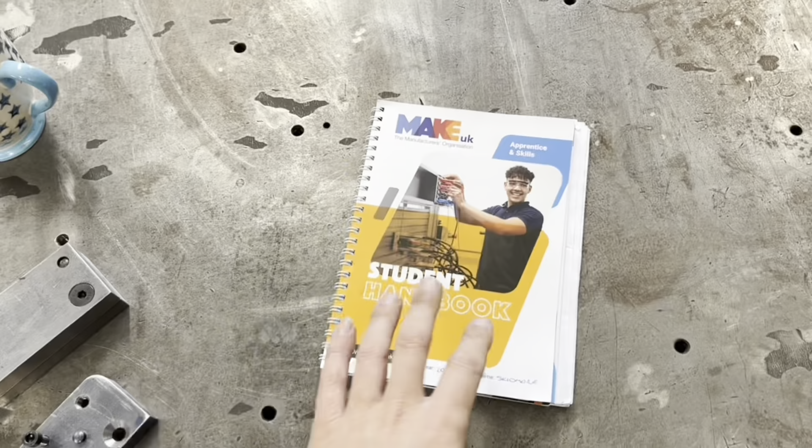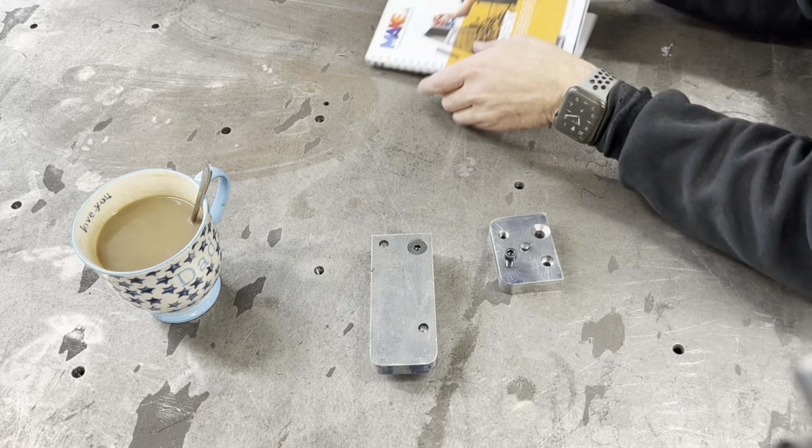Right, let me show you what we are doing now. So this is my place, Make UK. This has got all notes and stuff in, where you are and what you've been doing. This is my practical, so let me get it set up. And in here I've got the drawings that we have to work to.

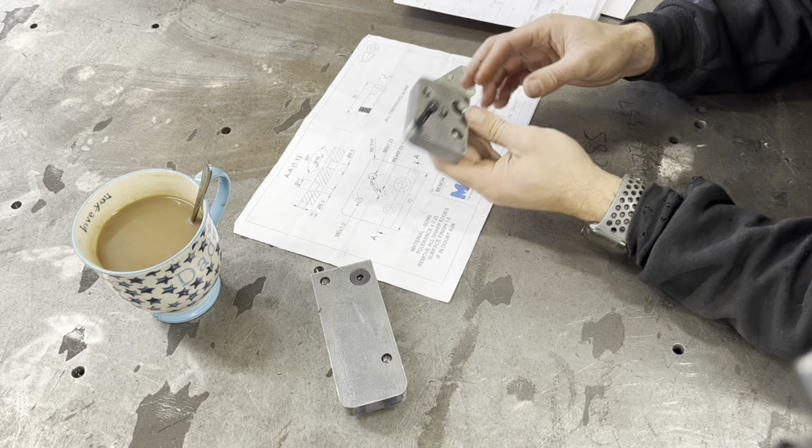So this one first is this - this is your test piece, right? And it's pretty simple. It starts off at 16mm, 50mm flat bar, cut on a saw, oversize - we've allowed 0.25 tolerance, which is quite a lot of tolerance when you're looking at machining sides of things. But we have to bring this into tolerance with a file, would you believe? So I have filed this square.

To where you cannot get a 0.05 feeler gauge in - that's how square that is, filed by hand. This is a number 5 radius, also filed by hand. Then we have an M6, an M8, a counter bore and a countersink, and this is a 6mm reamed hole, so it's nice and tight on that dowel. But you start off with just a block and you have to input your datums, your information. So you know your center hole is a 6mm ream, and that is the center of your part, dead center.

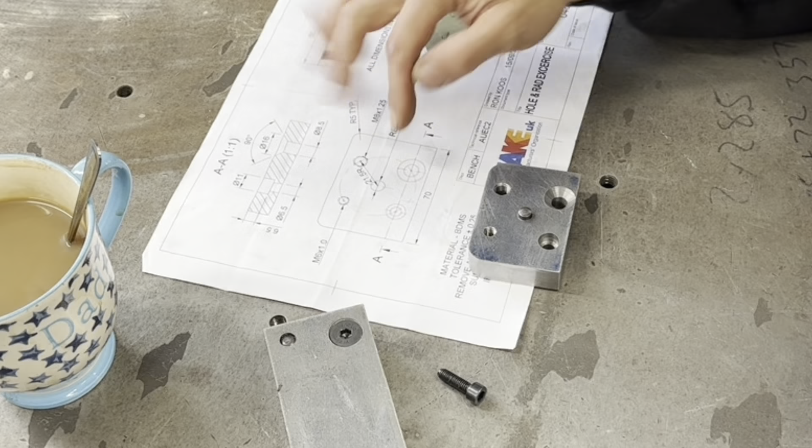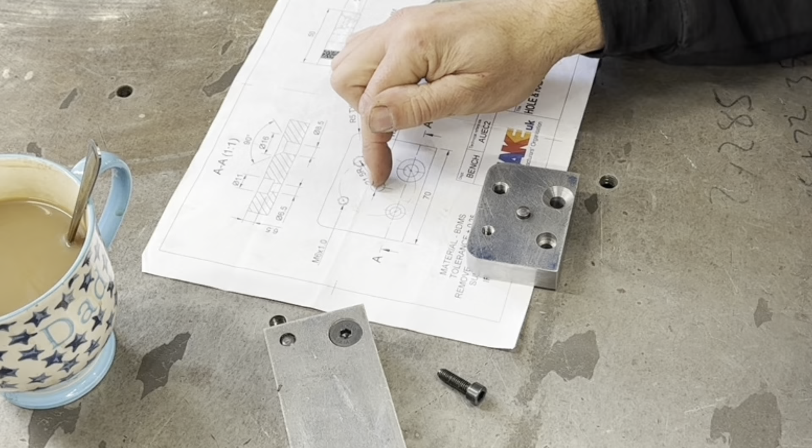Then instead of giving us locations for this, he gave us a radius - we've got a 21.5 radius. So then you have to work out the radius and the positioning of your radius to get your 45 degrees through your radius, do you know what I mean? So you find your center, then you put your 45 degrees off your center, and then you put your center line radius in. It gives you your center points. Then you've got your...

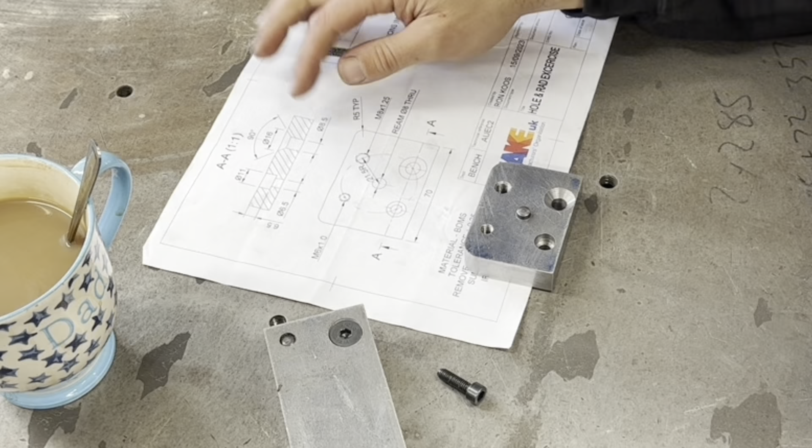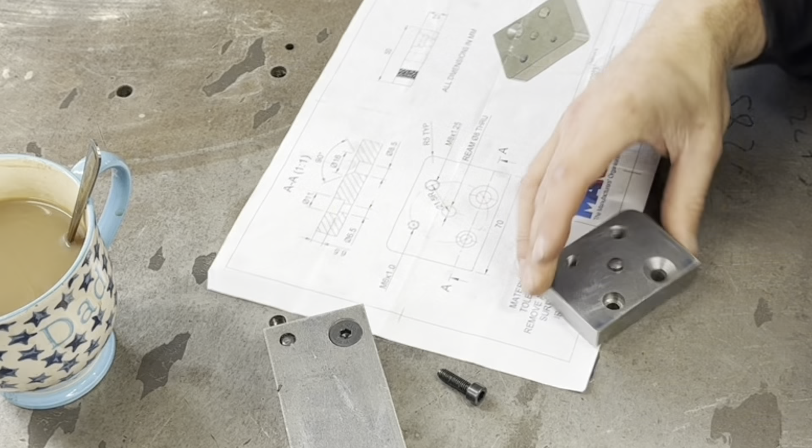Dimensions for your holes. This is the clearance 6.5, so for an M6. Clearance for an M8, 8.5. You've got your radius, you've got your diameter of your top of your counter sink, and then that's about it really. It's mainly just to prove that you can get it to where they want you to be and you're in. Let me show you the difference between a counter bore and a countersink, in case anybody doesn't know the difference.

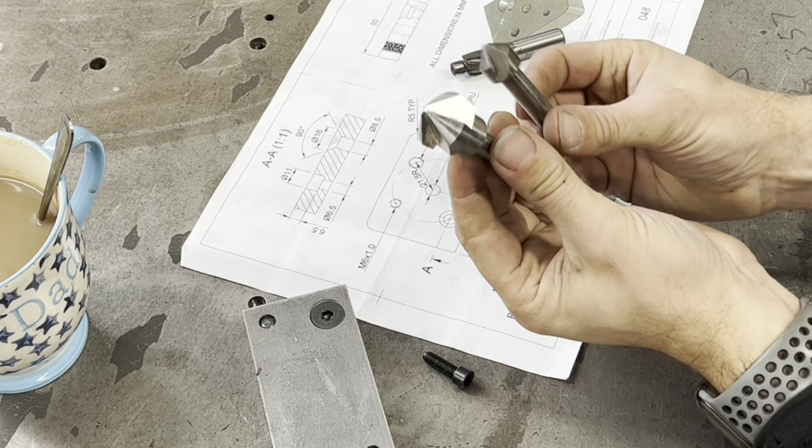So let's zoom in a touch for you. So these are countersinks, yeah? They are triangular, basically, sort of thing. And they are for, like, say this, yeah - countersink, countersunk bolt, countersink.

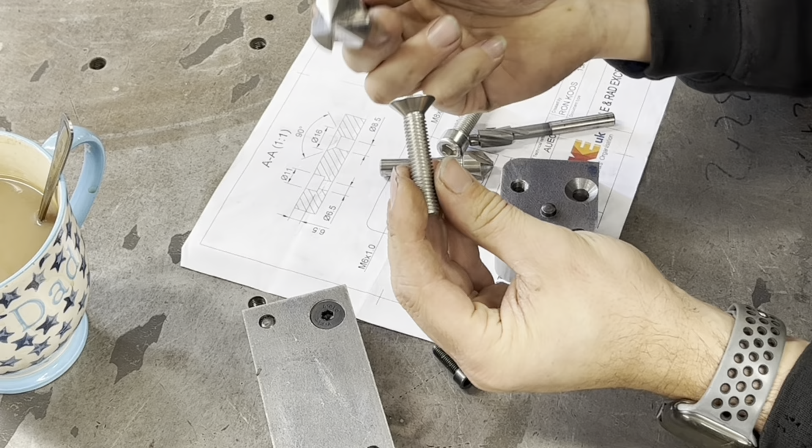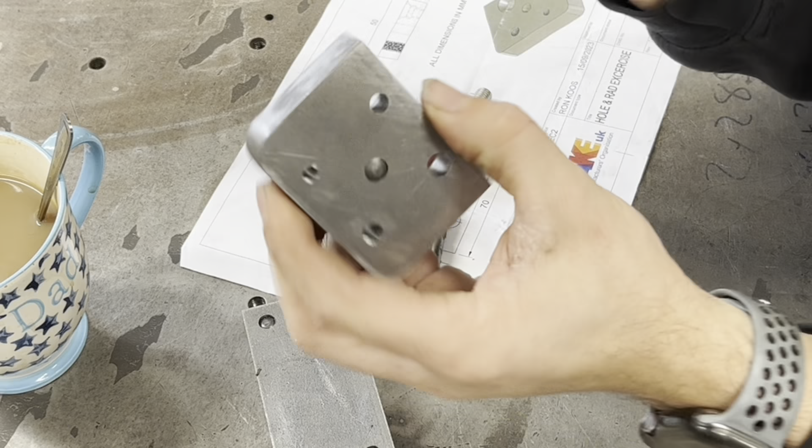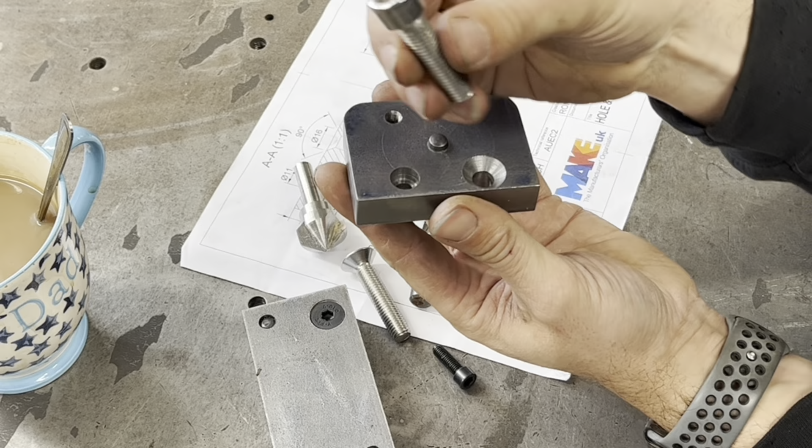Counterbore is this - you are boring a flat in, yeah? So you will drill your hole, which in this case is 6.5mm. Then that section there is guided by your hole. And then this is your bore, so you are boring down as much as you need. And that is for this type of bolt. I should have brought one over really, but I didn't, did I?

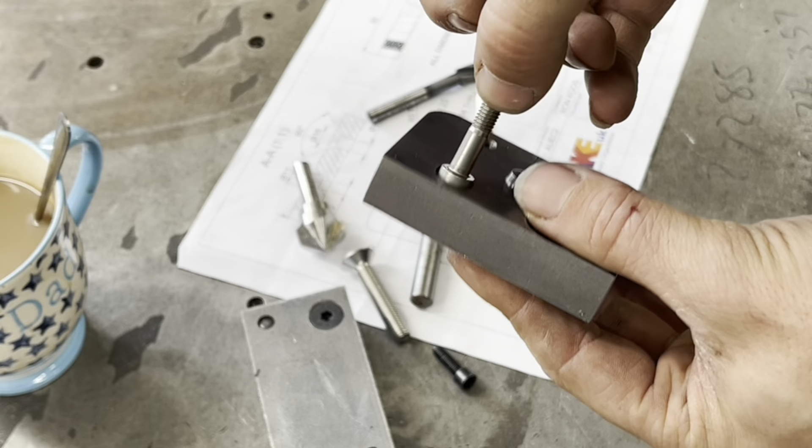So, counter bore. See? So everything is flush fit away. Dog's chasing a pigeon, yeah? So that is what this is for. This is to show you can do your markings out and come within spec. You know, this is within spec - we worked it, it's about 0.05, 0.07 within spec.

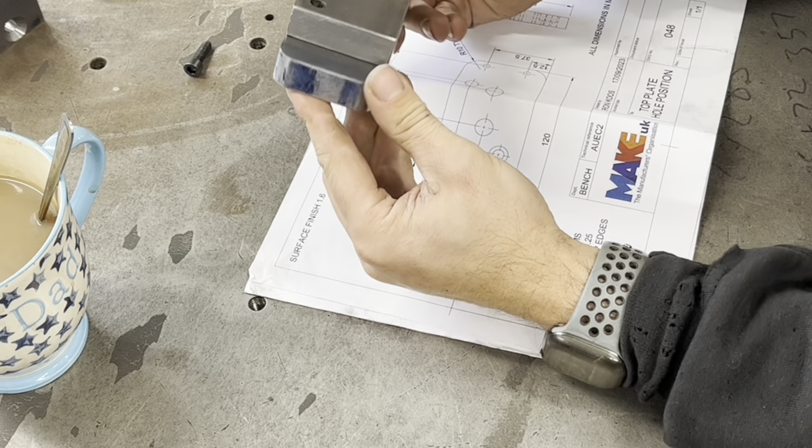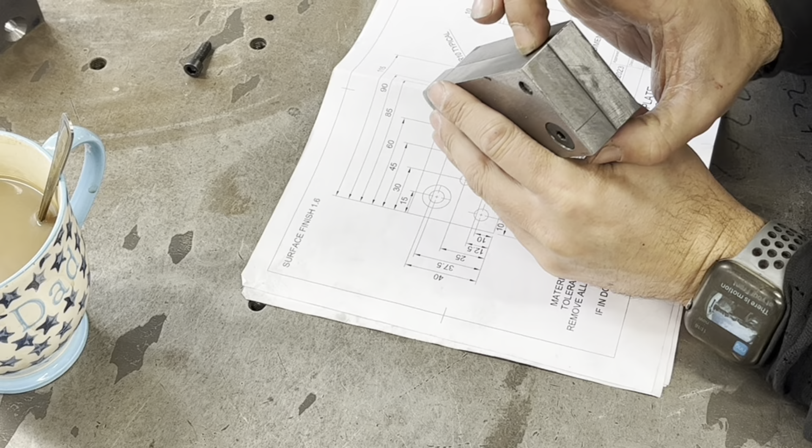Now you'll pay good money to get that kind of spec. So we'll move these tools out of the way, move this drawing out of the way, and we'll move on to these two drawings. This is this unit. Now this is also filed within spec by hand, R10 radius, square. To be honest, it came out better than I expected it to come out. These are perfectly parallel. So this is this unit - here we have two M8 reamed holes, and this is my countersunk.

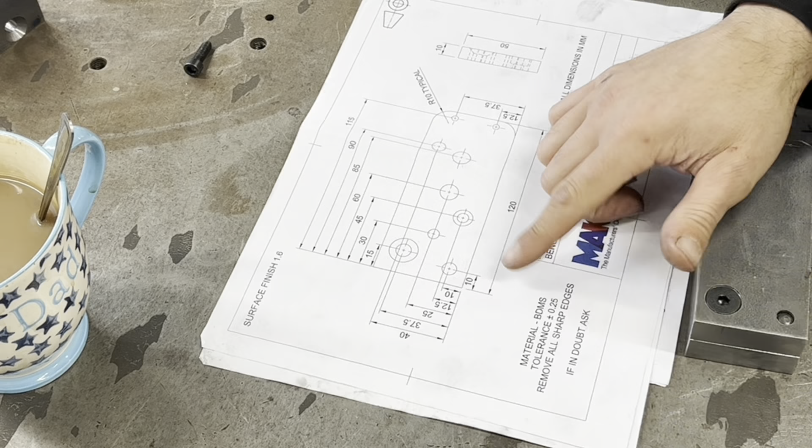So on this drawing, you can see this is our datum point. Everything works off this datum point. So our measurements go here, from here.

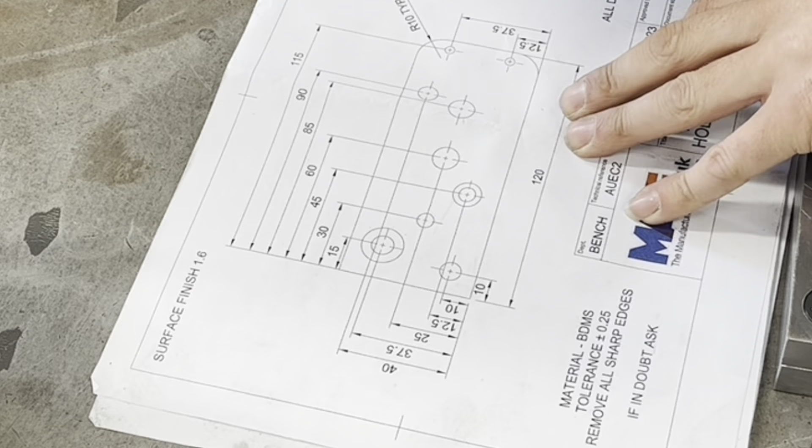We've got 10mm, 15mm, 30mm, 45, 60, 85, 90, 115, total 120mm long. So you're coming in 15mm and going up 37.5mm. This is how we are finding our positions on our plates.

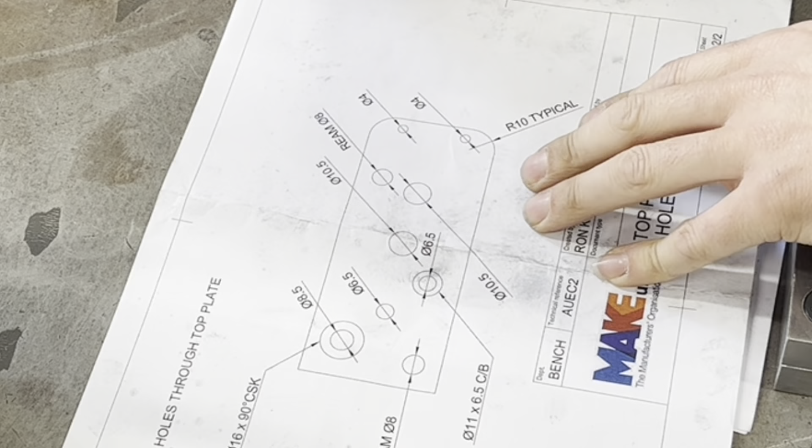There is another drawing. This gives us our hole sizes, which tells us what's what basically. So we've got, these are number 4 rivets, but we might not be using the rivets now, which is a shame because I've never done that before.

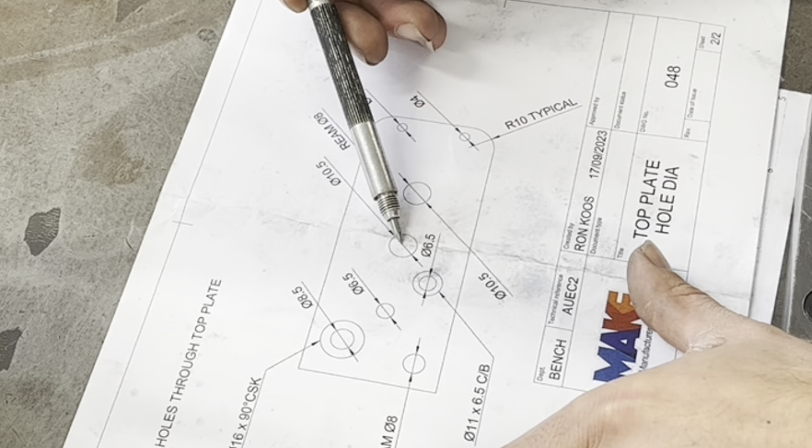This is our M8 reamed hole, ream number 8. This is a clearance 10.5. We've got our countersunk 90 degree, which is one of these, 90 degrees across its plane. 16mm top dimension, 8.5 clearance. This is a 6.5 and this is a 6.5 counter bore, CB, counter bore.

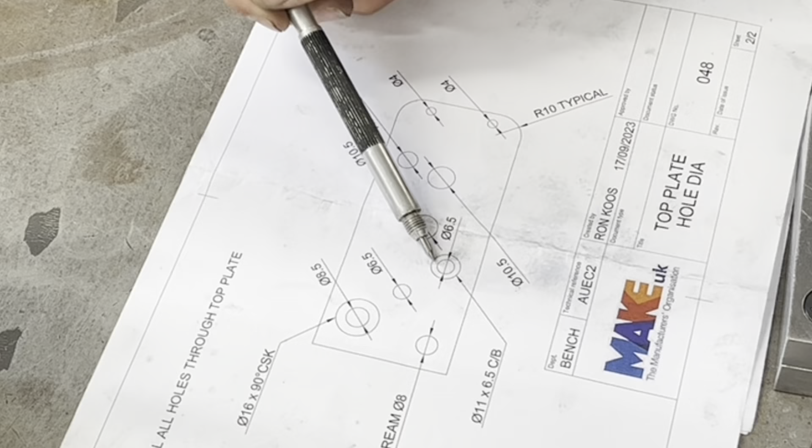So all of these are clearance holes in the top plate, and the bottom plate is where all the bolts are going to screw into, pass through, or blind hole, open hole kind of thing. That's where the next drawing comes in.

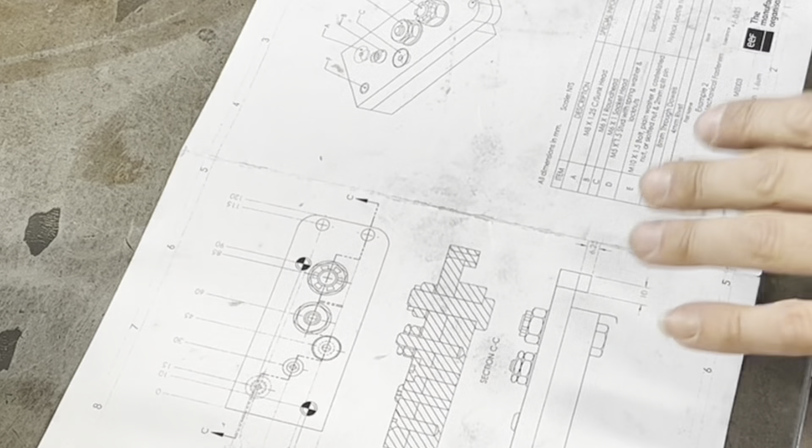Where is it? Here. This is our third drawing of the same part. Really, I should actually be making this, but I thought, you know what, let's just explain.

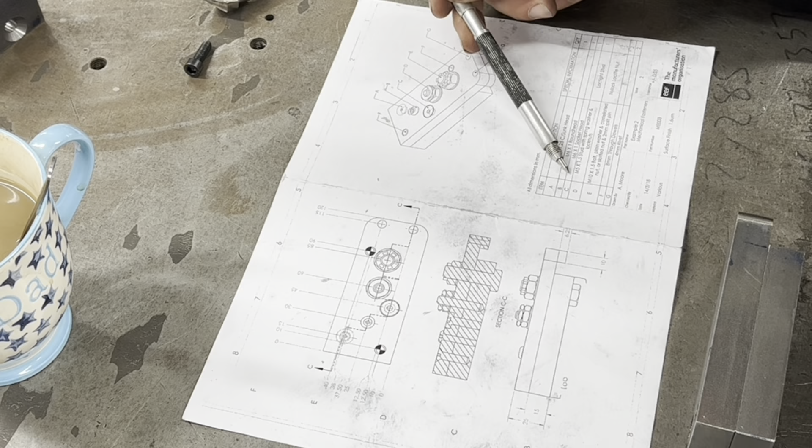So this is a slightly more detailed drawing, I think. These are the newer types that we've just seen. This gives me more information, because we've got our description list, our part number, a description list of said part, and what you need to do, like special information. One's got Loctite, one's got a Nyloc nut, and you've got your quantities.

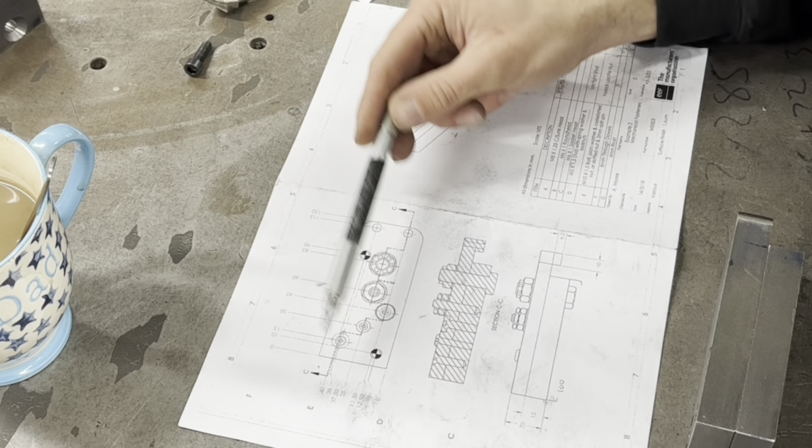So what we've got here is our layout, which is our datum point. So our dimensions up, our dimensions across. This tells us what we've got to do.

As in, that countersink bolt that I've already put in there is a blind hole. Doesn't pass all the way through. This passes, this passes. This one is a blind hole, doesn't go all the way through. And this passes.

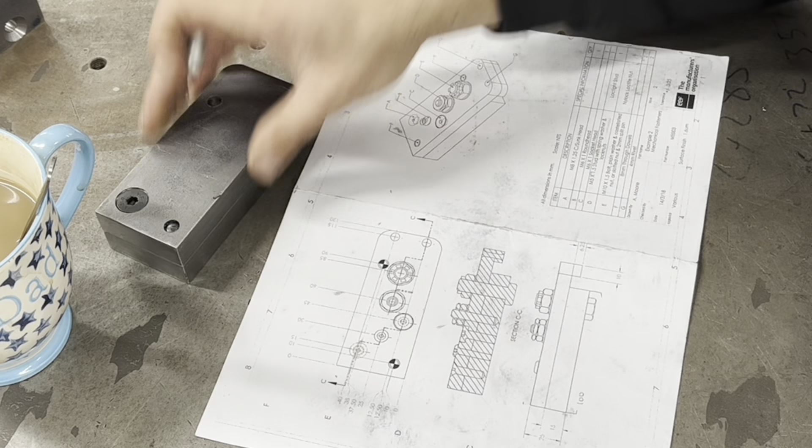And knowing that this bolt here, which is that bolt there, which coming onto this drawing is this bolt here, I then know B is an M6 by 1 round head, which I haven't. Have I got an M6 round head? Basically like one of these.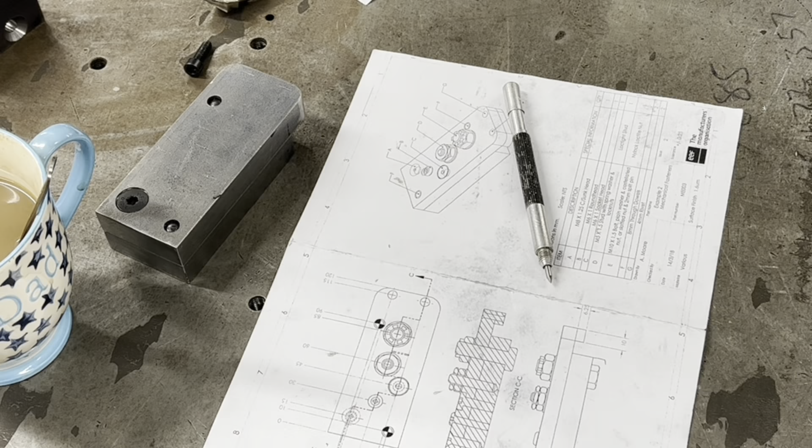I think they're called button heads or something, aren't they? You know, these things, so these are like button heads. So I know that bolt is this bolt.

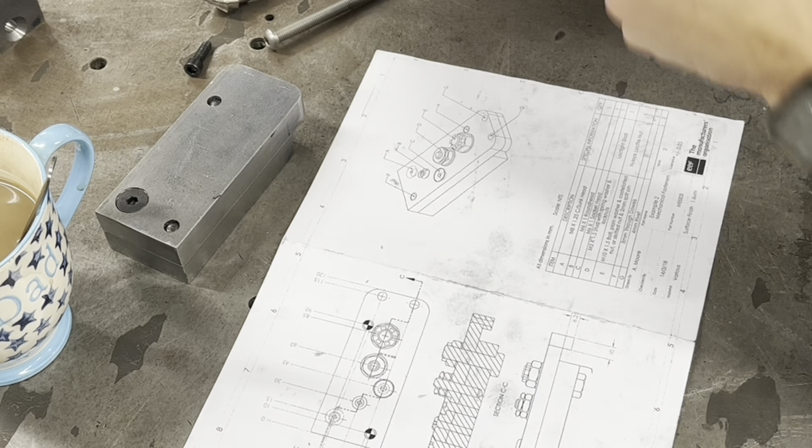So we're on B, M6 by 1, round head, 1 being the pitch of thread. We know it's a pass-through bolt, and we know the top plate from here is a 6.5mm clearance. And I know that this top plate is 16mm deep. It's oversized, it's supposed to be 12mm.

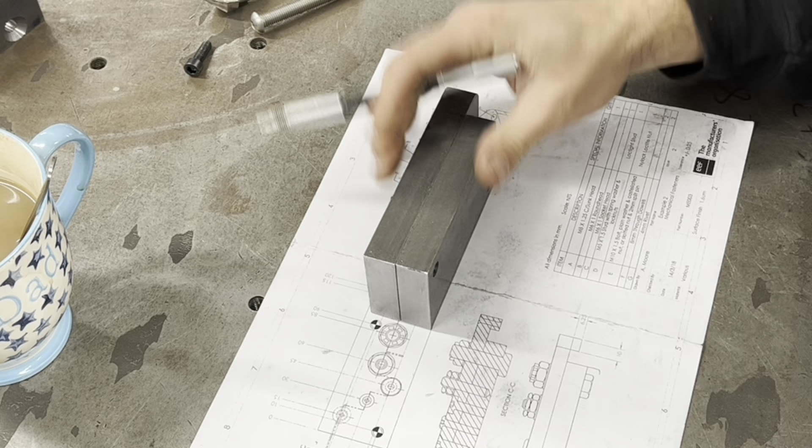So I know what I'll be doing with this, because it's an M6, 6mm, I'll be putting a 5mm drill bit all the way through, because that's my tap size. Then I will be coming down 16mm with a 6.5mm to give me my clearance, and then we'll tap the bottom.

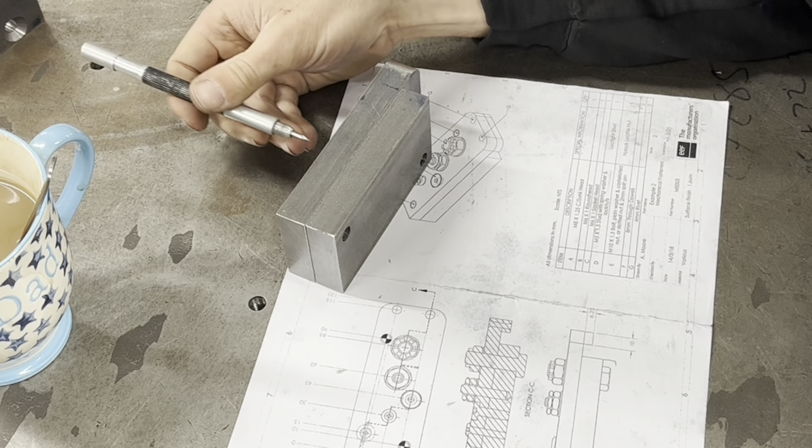So I'm not actually going to split this apart, because I've got everything I need on the paperwork. Because I know this dimension, if I touch my drill bit on the top of there, then follow down 16mm, I will stop here. So I can clearance down, and the bottom's already at tap size.

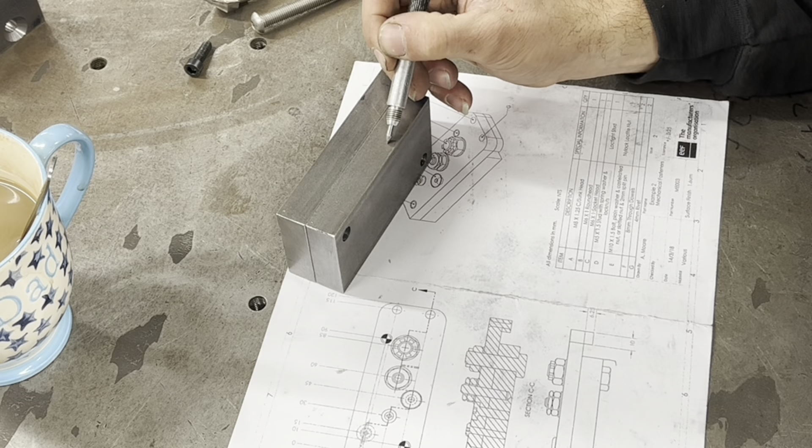Same with the rest of them except for this second blind hole. So I'm going to be coming down 16mm, and then I know I've got another 16mm, so I'll come down 10mm and leave the bottom closed off. So it's just to show that you can make something within spec.

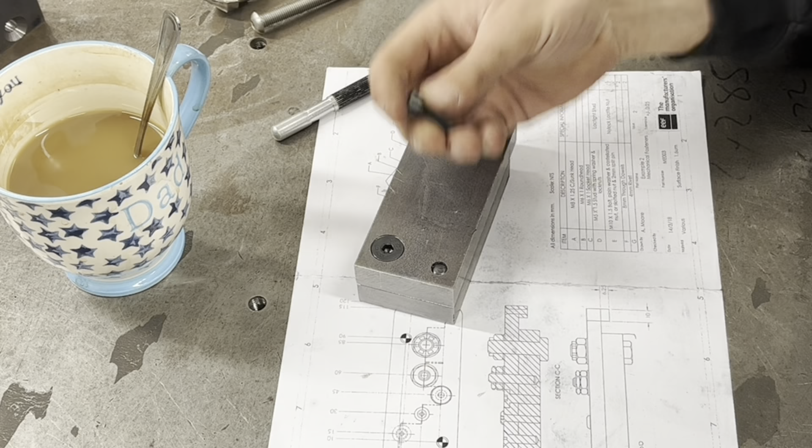And this is all the different types of fixing, near enough. You've got dowel, countersunk, counterbore, nuts and bolts. This one is, let's have a look, shall we?

Just have a look on the drawing. D. It says here M5 by 1.5, but that ain't right, because you'll never get a 1.5 thread on an M5 bolt. That is, I'm guessing, an M10 1.5 pitch with a sprung washer and lock nut.

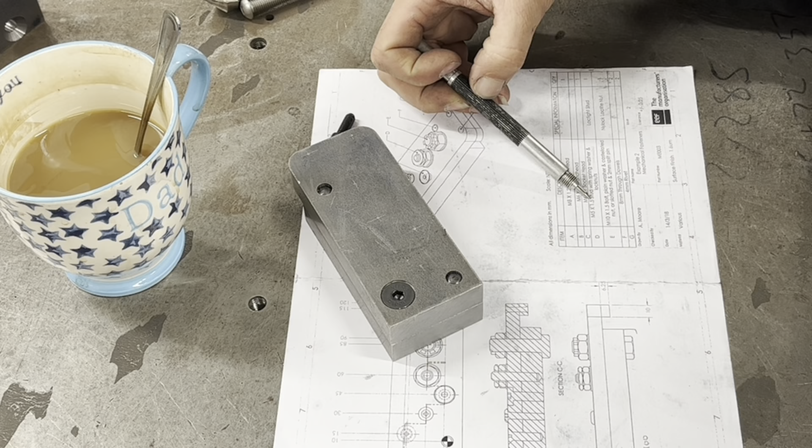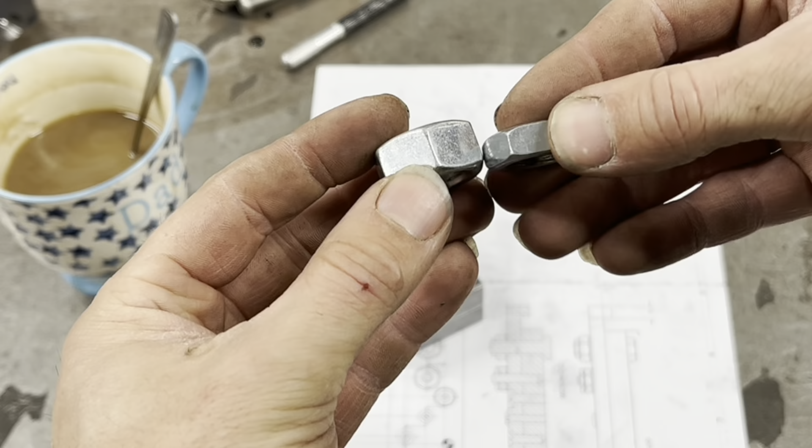A lock nut is a half nut. So you've got a full nut, which is a full depth of nut. So you imagine that your bottom one is your main nut and your top one is your half nut. So basically they're normally half, and they're just so you jam them together.

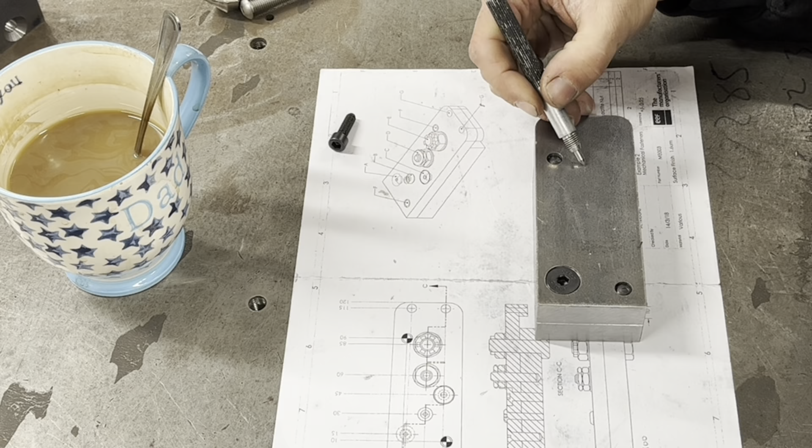Jam nuts. So what I'm going to do now is I need to crack on with this. I have actually already marked this out in the past. There, and there. I'm not going to do these two.

These are my priority. What I'm going to do is I'm going to re-blue that and just give it another knock on them, just so I've got 100% where they are.

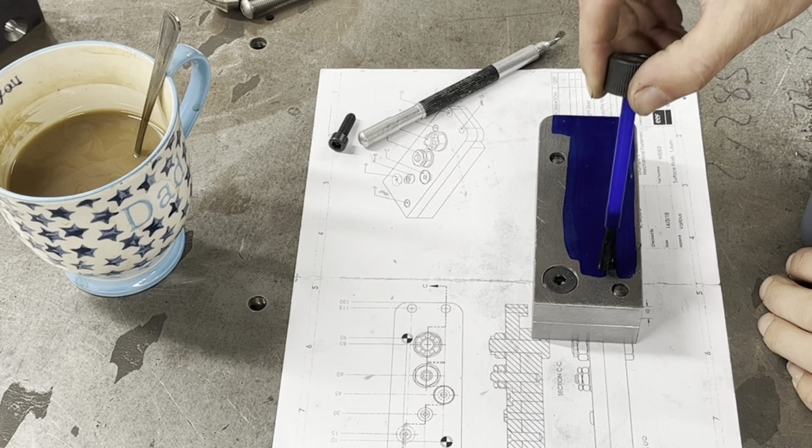And then I need to chuck it in the milling machine. I'll do it all the way to the edge, because I've got those two there for the rivets.

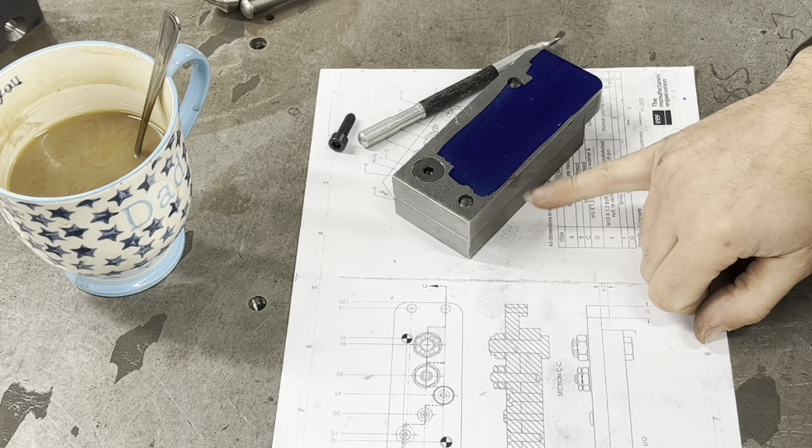I did say to my tutor, what about if we was to drill and tap them? The problem we've got is this is supposed to be, I'll tell you the actual dimensions, total is supposed to be 25mm, a 15mm base plate and a 10mm top plate, but we didn't have the stock. So this top plate is 16mm.

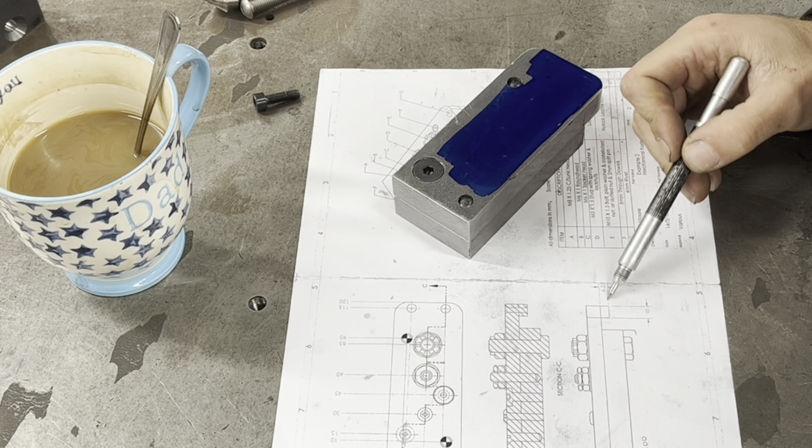Well, the rivets aren't big enough. There's a section that's supposed to go on the bottom of here, which I haven't actually made. It hangs on the bottom and it's riveted on with brass rivets, and it's 6.25, which gave us a total of 16mm. But this is itself 16mm, so we're not going down that path.

Right, I'm gonna sort the milling machine out, look, 'cause it's hidden away. Shit everywhere. Right then, I'm gonna get that tidy.

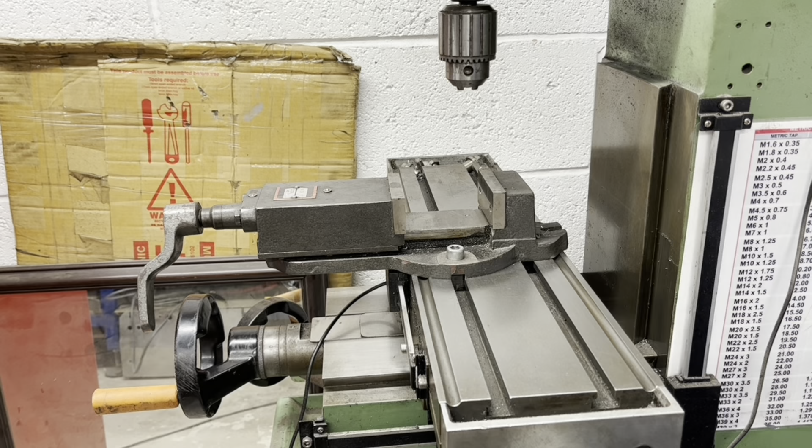Right, get this chucked up in there. A couple of small parallels, I think, just to aid keeping her square.

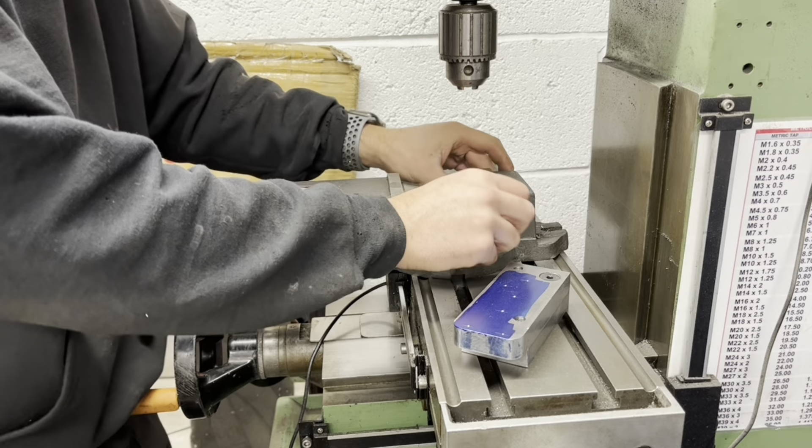Should be able to do pretty much all of this in one quick hit. Hopefully.

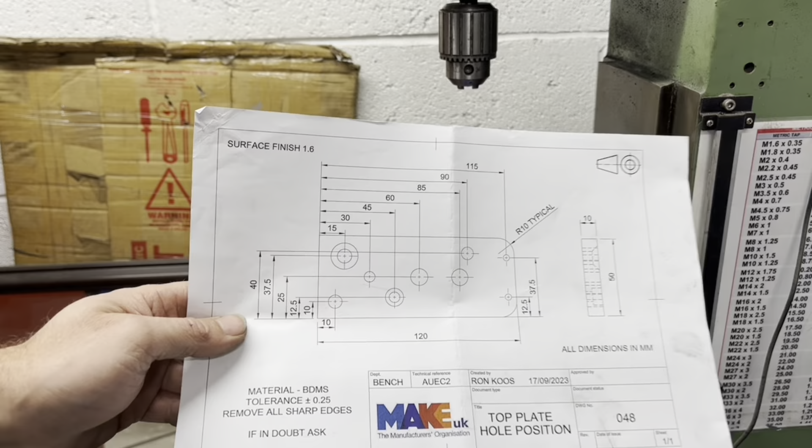So what we've got on this drawing here is this one, and this one, all run on the same dimension, 25mm. We can just smash out all three of these because they're running with each other, do you know what I mean? So we're going to put a centre thing in.

And that will get us so we can see, so that is on the one. Yeah, that is on dead centre. So we'll drop it down. Yeah.

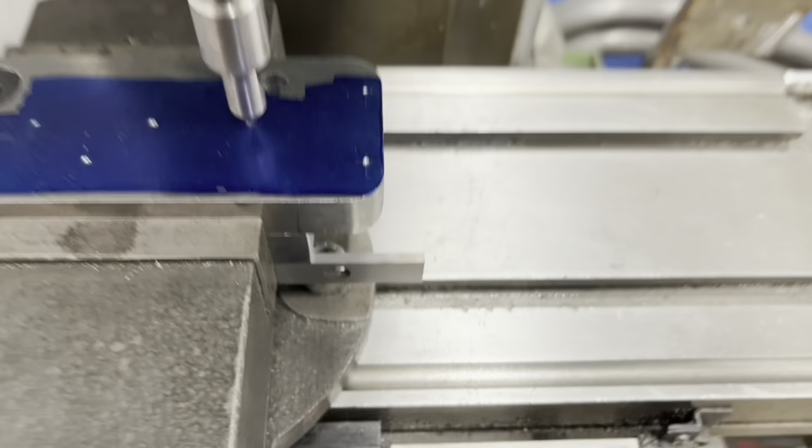So what I'm lining up on is I can still see the cross marks where I put my centre punch. See whether you can see it. Don't know if you'll pick it out. Yeah, can you see the cross marks? So we need to get these drilled. I'm running out of time.

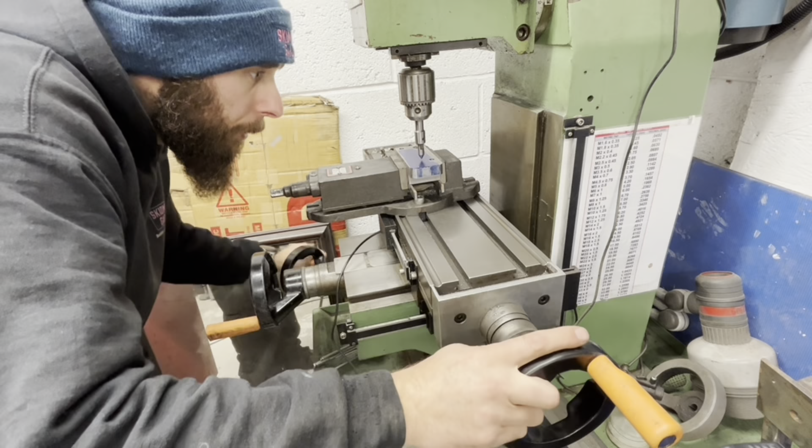So now we know we are. I'll get this one lined up. I am happy with that.

Drop it down. So this one is a straight through clearance, so that's a 10.5. Centre drill. Chuck key.

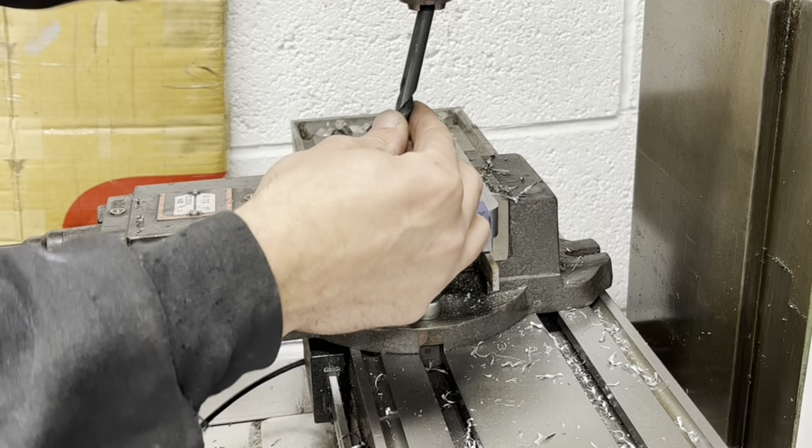So this one, remember, is an M10 stud, non-pass through, so it's a blind bottom. First of all, I'm going in with 8.5 because that's the tap size drill bit, isn't it? Anybody who doesn't know, if you've got an M10 bolt and the pitch is 1.5, take the pitch off the bolt size and it will give you your drill size. So an M10 is 10 millimeters, 1.5 pitch, take the 1.5 pitch off the 10 millimeters, gives you your 8.5. That's why for an M6 bolt, 1 mil pitch, it's a 5mm drill bit.

Right, so what we want to do now is bring this down till it touches our work. The point now is about level with the top of here, and I'm going to zero my DRO. I say DRO, basically I've just got these things, so I'm going to zero this.

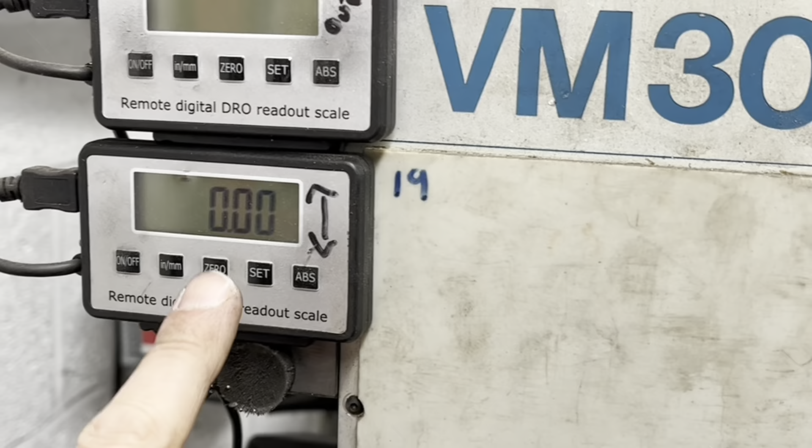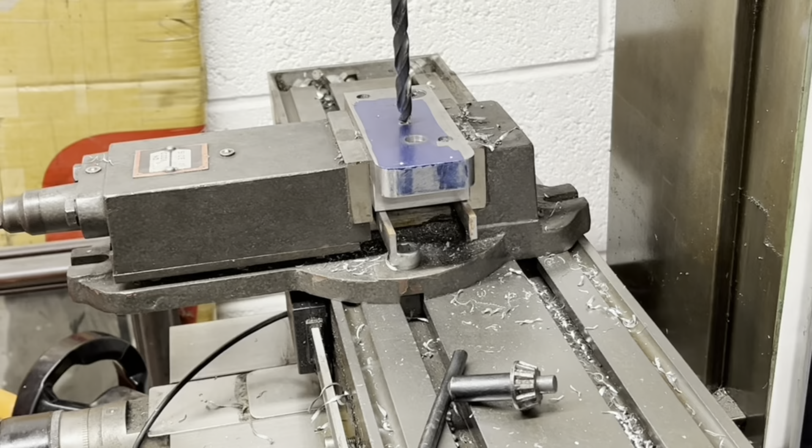Right, get that done now. I'll tell you what, I'm not on this camera today, am I? So basically on here, I'm just going to come down to minus 26mm. Slow that down a bit. And then we know we're at the right depth. So remember to pause a little bit to break the chips.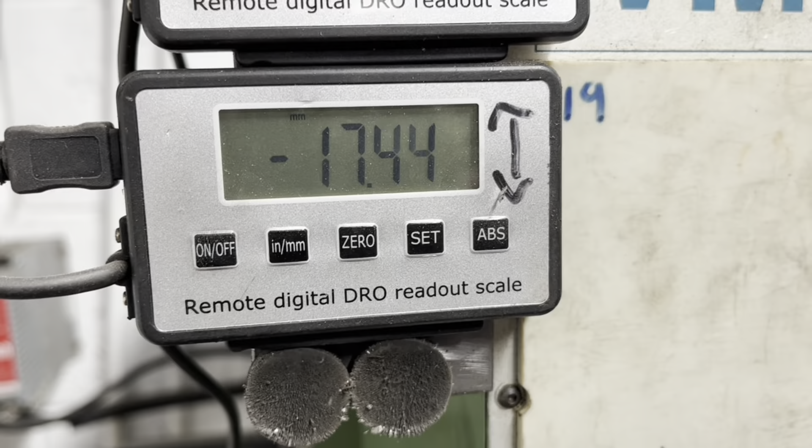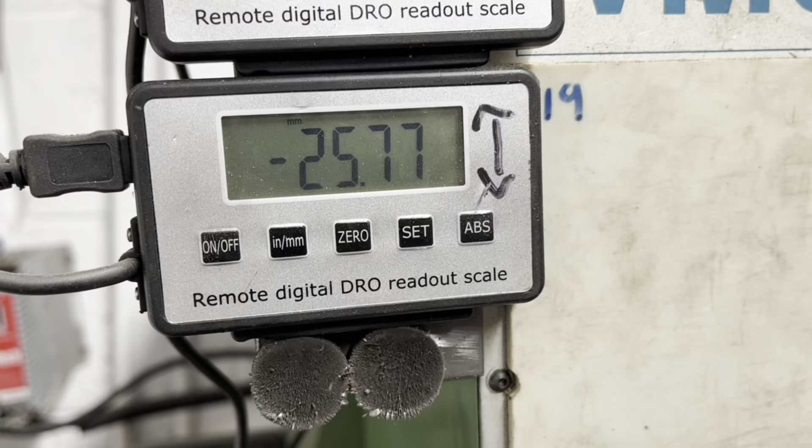So now we need to open up our top to the 10.5, 16mm deep, you get me?

Right, so what we've got here is our counter bore. So what we're going to do is we're going to drop that into the hole that we've opened up to 6.5 until we're just above the job. We're going to zero our dial.

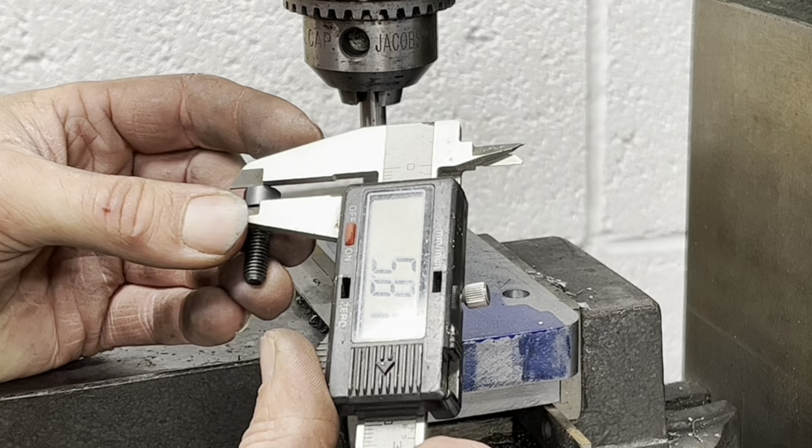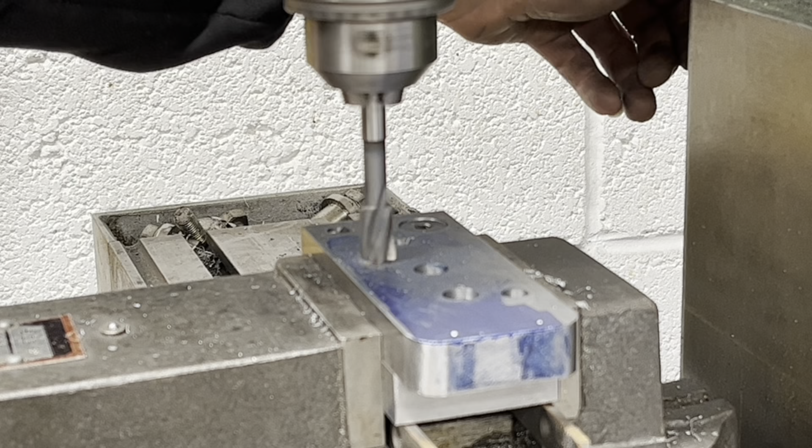So I want to go past that because I want a clearance. So I'm going to go in 8mm. We'll go in 7mm and see what she looks like. Slow it right down. These do not like speed.

So what we're doing is slowly cutting in. There's our 6. We'll go a mil past. That's 7. We'll just take it out. Look at our head.

Yep, we are under the surface, so I'm happy with that. So that is about it. So we've got our M6 tapped, M6 counter bore. That's an M10 threaded, and that's an M10 straight through. We're about done there, people.

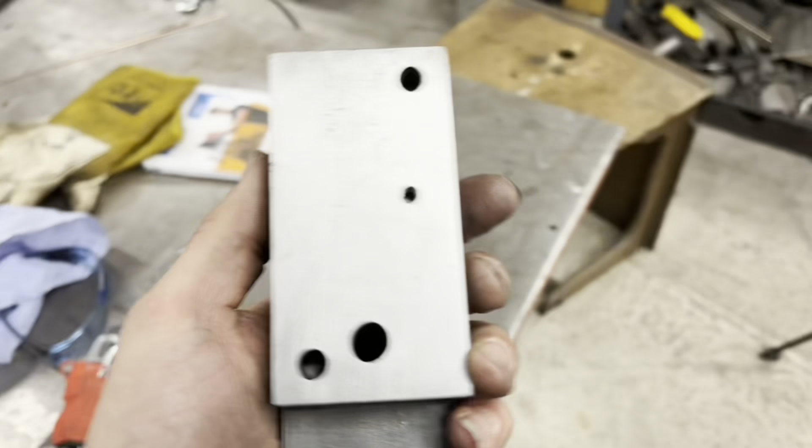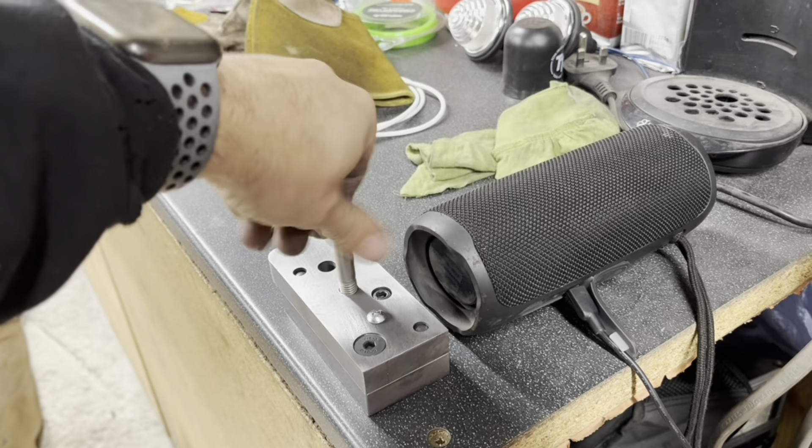We've got to do that at college. It's basically, imagine this, we've got to make this with the end chopped off, with thread coming down, with a shoulder in the middle. We've actually got to make that at college. So,

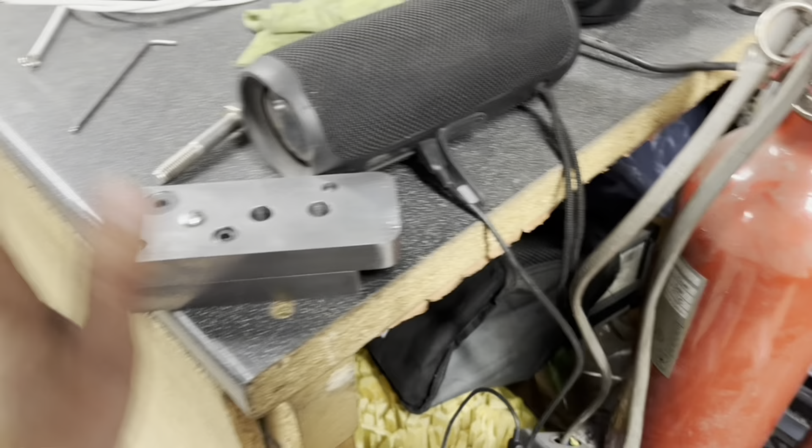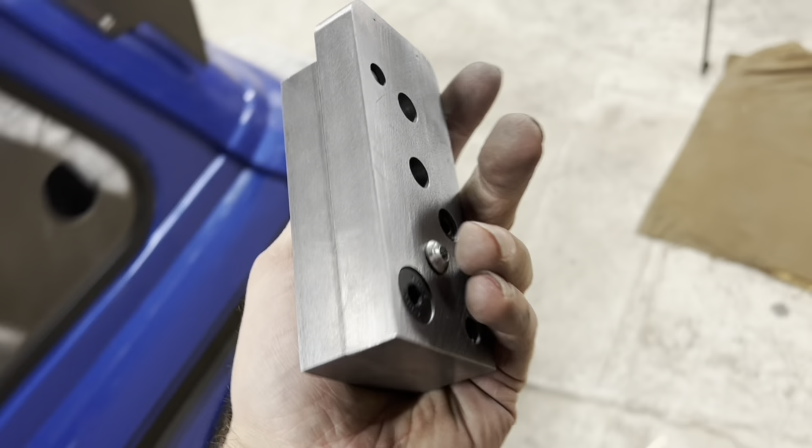Yeah, there we go. So this is part of my college work. Yeah, ain't looking too bad. Right, I thought I'd show you that.

College tomorrow, that's why I've had to do this today. I've had 2 weeks because we've been off for 2 weeks. Well, now I need to get done.